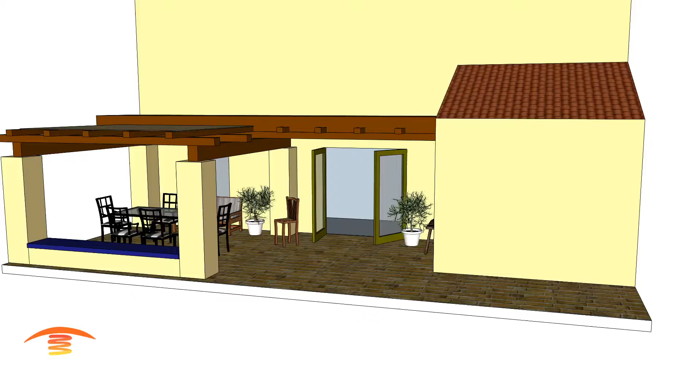Today I'm going to take a look at this residential application. So we have bench seating here, a dining table here, and also a little reclining couch over here. They do have a chair.

The issues we want to look at are things such as the door swinging out, and also they have a textile shade cover, and you want to make sure that's secure and not falling down into the clearance area of the heater. So let's go ahead and look at the dimensions.

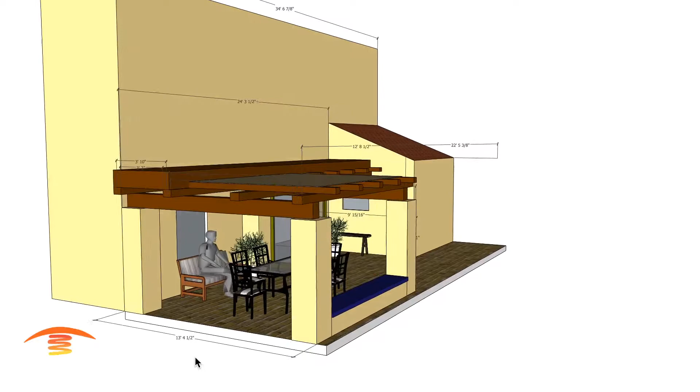Dimension wise, I have this roughly 13.4 to the outer edge into the wall. This section here is about 9'1" to this inside edge here. And then roughly about 12 feet outside to center of post here.

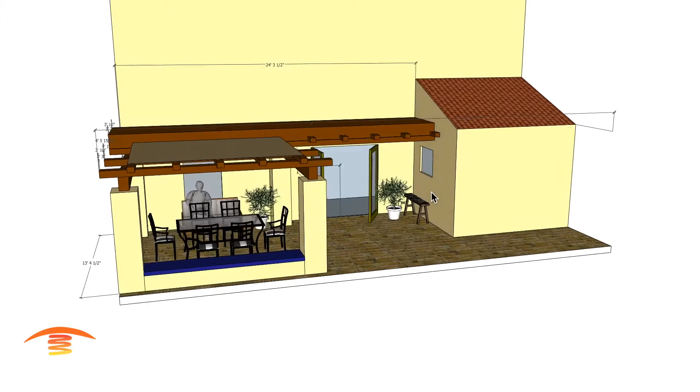24.3 all the way across. And height wise, I think I have it at 7 foot, 7'1" to the bottom edge of these beams here.

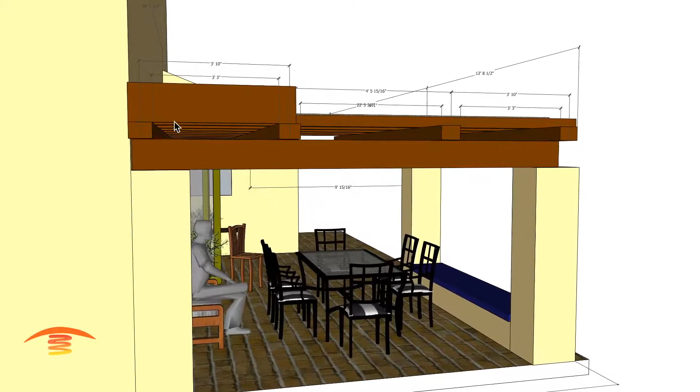And you can just see that there's some measurements that the customer gave me. I have these at, I believe, 7 inches by, I put them at 5 inches I think. So you can see the distance we have apart from each other, as well as center to center.

All right, let's turn that off. So I have two different options now. Here I have the 4024C model. You could use the slimline model. The reason you might use a slimline model is because it has the adjustable brackets.

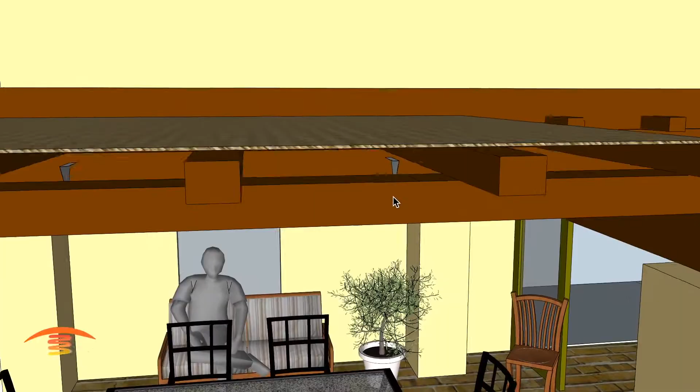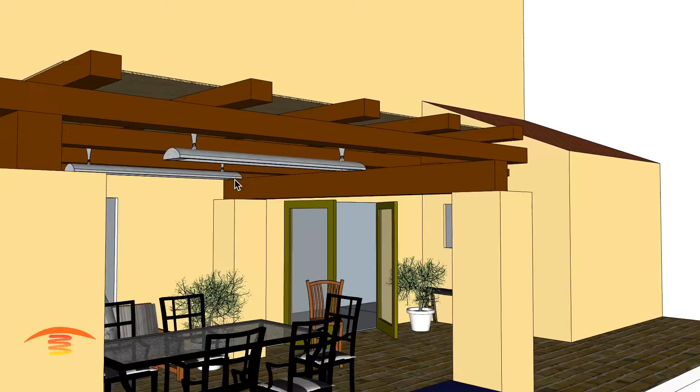So you can physically adjust the brackets - this bracket here would move left and right - but I chose this just because I'm not sure if the customer wants a hotter heater or not. I think this 4,000 watt would be hot enough, and I just wanted them to see what that would look like. Again, the slimline is the same output as the 4,000, so it could be substituted.

The other thing they didn't give me was the correct dimensions between each one of these beams, as well as where it starts and where it ends, to here. So that's not important, but it's good to know.

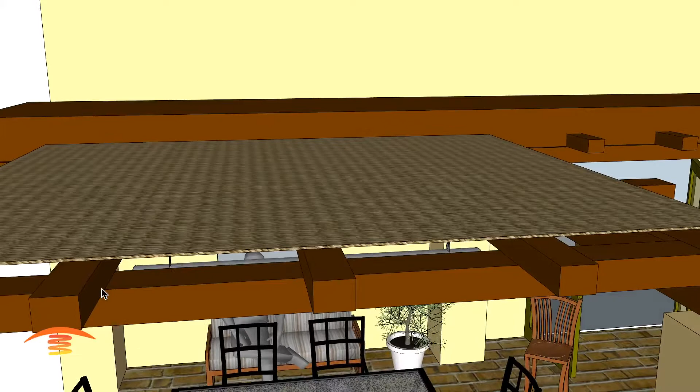You might want to take a 2x4 or something, paint it to match, and run it across the top of this to attach this bracket and get it right here in the center of the room. That would help secure the shade structure itself, but also give a place to secure exactly where you want these brackets.

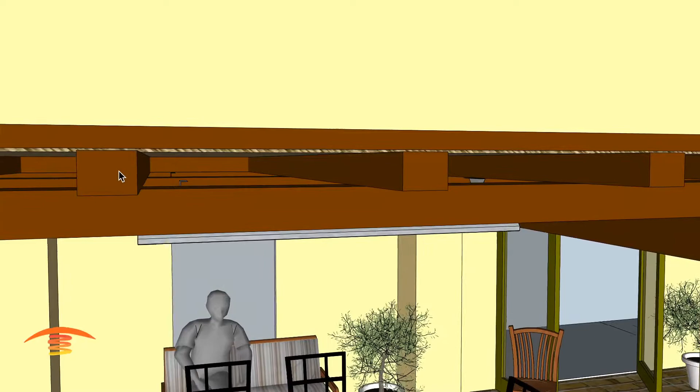And you can get the extended brackets. I think I said this is a 4-inch tall beam here. It might be taller, but they do have a 4-inch taller bracket you can get to make up for that distance. So I have this heater physically 6 inches from the top edge of the heater to this beam.

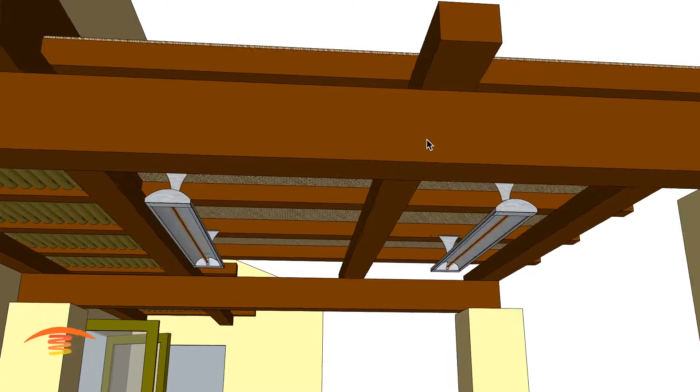I also have it placed center between these two beams. And this heater over here, I have placed at 6 inches off of this edge of the beam, so I have my 6-inch clearance above.

Let's just see that real quick. So you can see here my clearance above is at 6 inches above the top edge of the heater, so it's all the way around above the heater's top edge.

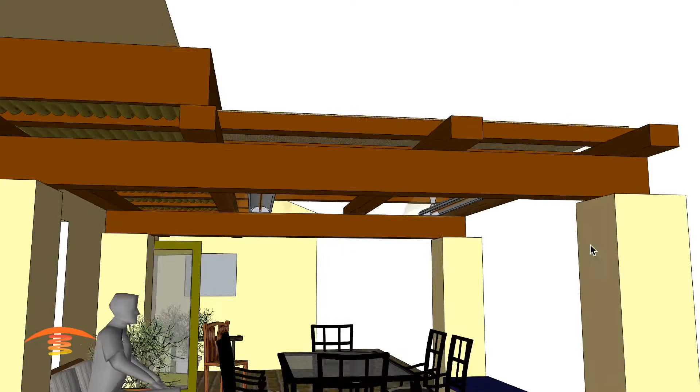And also, if you wanted to look at the clearance below, you can see with the heaters pointed straight down and at the 6-inch clearance above, with these being 4-inch tall, there's no problem with the clearance below.

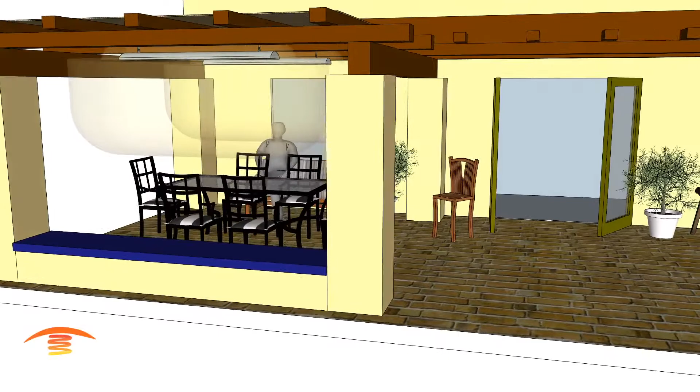Turn that off. And that's really the footprint of heat. Footprint of heat, you can see, is fairly well covered. I don't have the complete area covered, but if I put 2 units side by side, I won't be able to meet the clearances to these pilasters here.

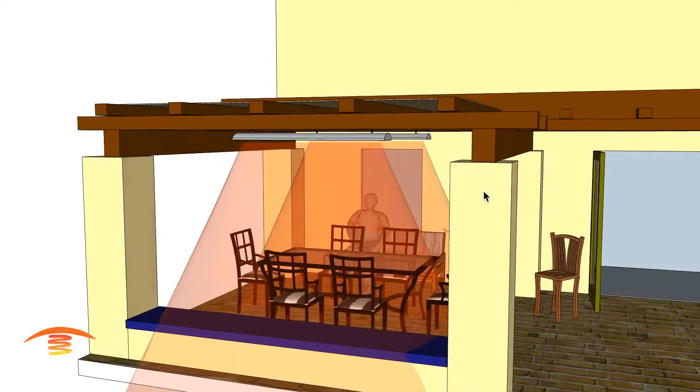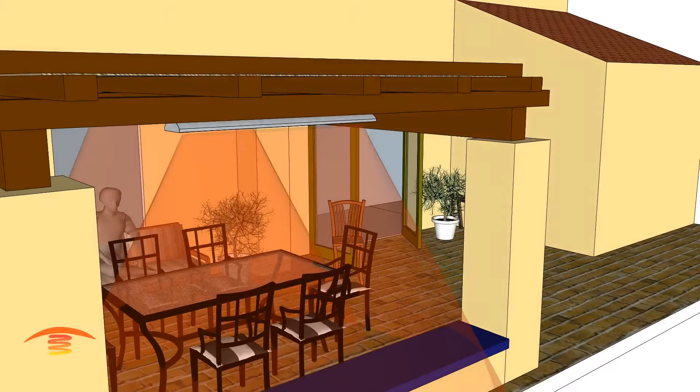Let's say that this is a stucco finish, but it's made out of a wooden frame, then that's considered a combustible item, so we can't interfere with the lower clearance. If I push this heater over, it would be hitting into that area, and so that's something to consider.

So yes, I have it centered here, and the footprint of heat is roughly, I'm going to say, 11 feet wide this way and about 8 foot wide this way.

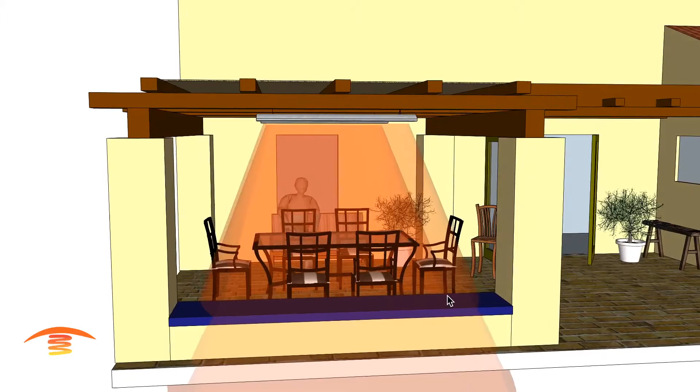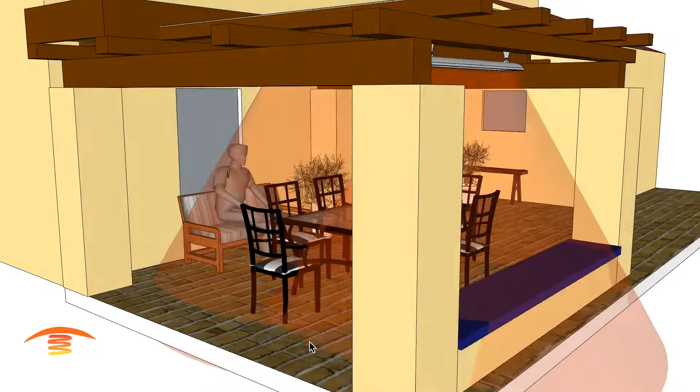And I only say that because of the fact that this is a light wave. It travels through space and absorbs into any object it comes in contact with: human bodies, chairs, tables, floors. So the footprint is typically wider, but because of the height, it narrows our footprint of heat. But you can see here we have pretty good coverage.

And then an added option would be to heat up this side over here, so you could place another unit. Again, we have that issue of where do we put the brackets. I don't want to put them on the wall.

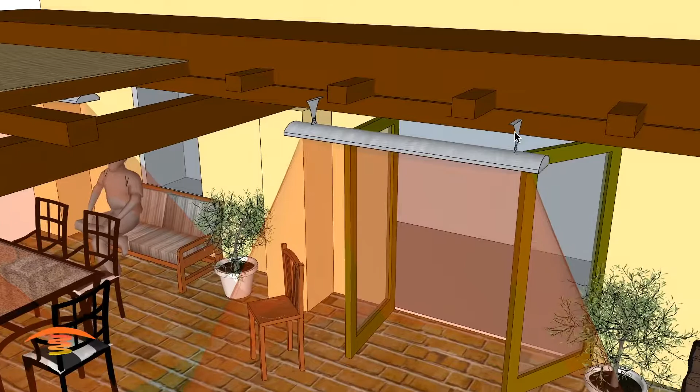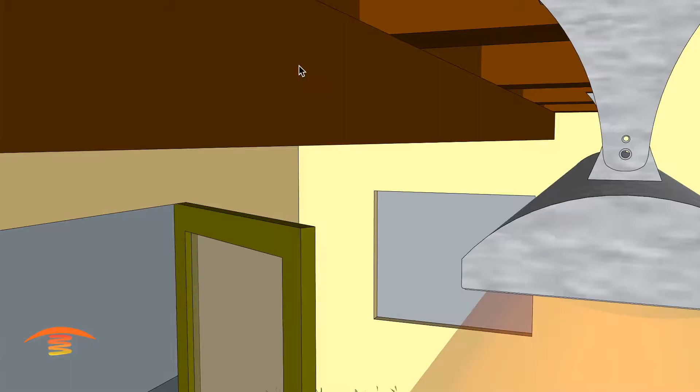If you could physically put them on the wall, if you came up with a custom made bracket, which we don't do, you'd have to have it mounted on this edge here and then out and over in order to have it at the same elevation. So this has got to be 6 inches elevation. And again, we have that clearance issue here that we can't really place that.

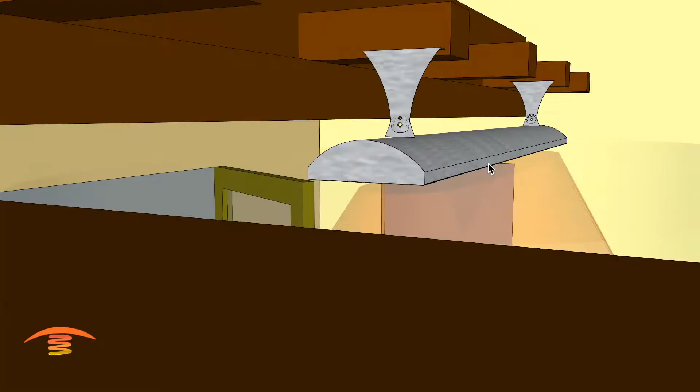This one here we could place at a slight angle, but we need to make sure we're not interfering with any combustibles. So when you place it up here, the bracket only really allows like a 45-degree tilt from the wall, so it's not going to give you the angle you're looking for.

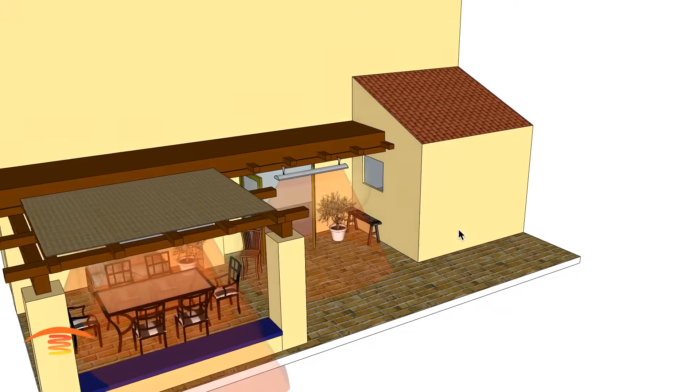So you kind of need to make your own bracket if you're going to mount a bracket on this edge here. But there you go - there's an idea of what that would look like.